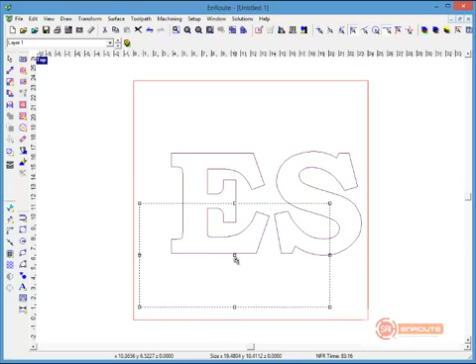Now let's just bring in some text here, and I'll bring in Bookman Old Style, which creates a nice stroke, and I'm going to type in EnRoute software. So we'll just put ES here just to bring some text on screen, and I'm just going to resize this. I see always an update of the height here. We'll just make it about 11.5 inches, a little over that.

Now I'm going to go to the text tool here and hold down on that, and then say convert this text object to curves. So now we have a couple of shapes on screen. Now I'll do this so that we have, first of all, a layer for our acrylic, and we'll do another one. We'll have a layer here for the aluminum. Alright, we have acrylic and aluminum, and let's just put this right in the middle of our sheet.

Make that just a little bit smaller and center that here. Okay, so this is going to be our positive acrylic. We're going to do a copy for this and put this on the active layer. So now we have this, and we would put a frame or something around the outside of that. So it's going to be a push through where we have a border here with some material, and these would be holes cut out of that center part.

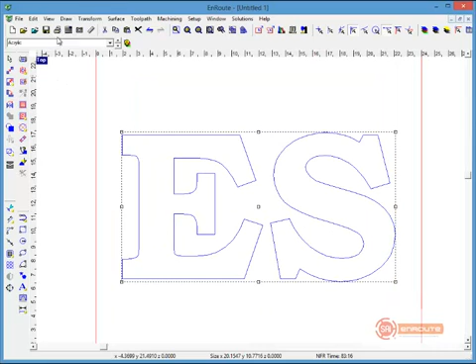Alright, and we'll go ahead and maybe just center this right there as well. Hit Control 5 and center it in the plate. So now we have two layers, aluminum and acrylic. Now the acrylic layer, I'm going to zoom in here a little bit so I can see this, and go to my toolpath menu and go to router offset.

Now we have this already as a strategy I can use where I've saved this previously, but we'll go through here and describe what we're going to do. We're going to go down to the end mills, which is my blue color here, and I'm going to select my 1/4 inch end mill. Different tools can be used, but we're going to use the same tool here to make this easy.

I'm going to use this tool twice. The first time will be a rough tool. The second time will be a clean tool. The clean tool will always be closest to the object, so that's going to create our shoulder. The clean tool will push the rough tool out, so the rough tool will still cut things out, and the clean tool width becomes the width of the shoulder.

So if we have 0.5 acrylic, let's say we're going to cut 0.51 for the rough tool, and then the clean tool we're going to not quite cut all the way through. We're going to cut 0.45 inches deep here. That's going to leave a lip of 0.05 inches. Now we'll take a look at a few of the parameters.

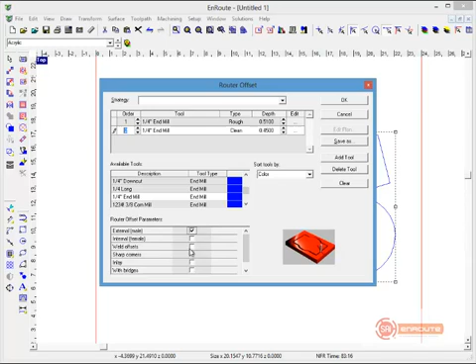We might want to weld offsets here because these letters are close together. So I imagine that we're going to have some connecting of these parts, so we do want to weld the offsets. And if I'm going to push this through another part, I'm going to do an inlay. So I'm going to come here and say 0.0, and you can use different values for different materials.

I'm going to say 0.01 for this, and this is the total inlay gap. So it's going to put 0.005 on the male part and 0.005 in the female part. When you are assigning the gap, you're doing the total gap. You do not treat them independently.

Now that we have our parameters set, we'll go up here and look at some cut definition, and we're just going to set our feeds and speeds here, based on the particular type of tool and the chip load that it might have. So we'll just put some kind of generic values in here.

And now for my clean tool, the clean tool, remember, is going to push out the rough tool. So I'm going to be concerned about the width here, and how much material do I want it to leave. So I'm going to make it a 1/4 inch width, and this is a shoulder, so I'm going to click shoulder. So I know that in addition to this letter here, I'm going to have 1/4 inch of material cleared out that is going to become the little shoulder that is going to keep my acrylic from pushing through. Now again, we'll put some feed rate values in here.

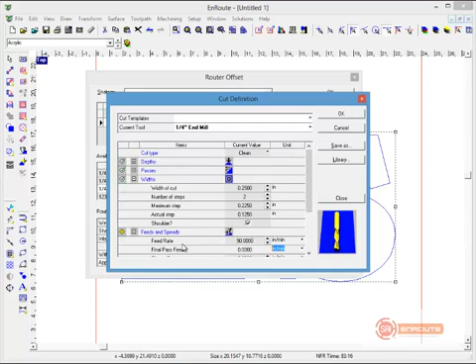And we can hit OK. So we have our feed rates here, our depths were assigned. We're just cutting this one all the way through. The other one's not going to go all the way through. One last thing is we want to do our clean pass before we do the cutout. So we'll do clean first, cutout second within the router offset strategy.

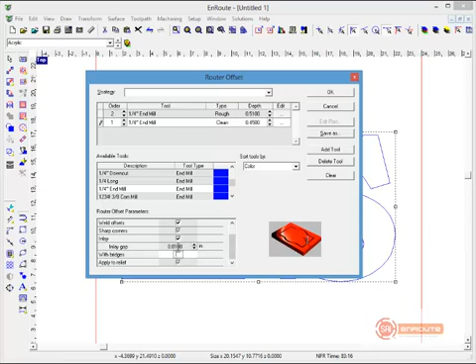And we have a 0.01 gap, remember, for our margin. Now I'll come here and hit OK. And we did just connect right here where these two parts were close enough together to touch. So now, if I zoom in here, you can see that the green part, if I hit F9, it will paint it with the width of material it's going to remove. So this green represents my push-through shoulder, and the blue represents where it's going to be cut out. And it's just going to touch right here.

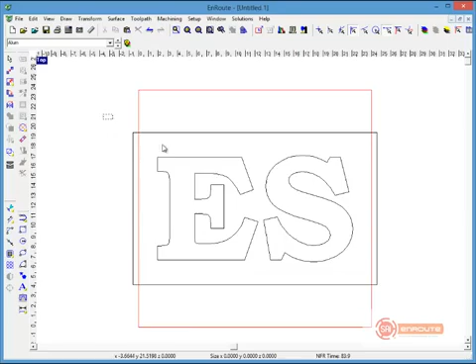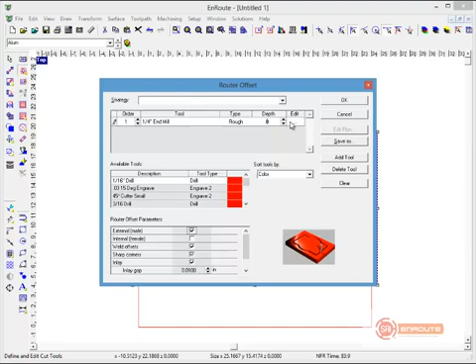Now when it comes time to do the pocketing, we are going to take these parts, and in this case we're going to use also an offset. It's also going to be a rough cut, but we're not going to have a clean pass here. There's no shoulder. We are going to do an inlay, and we can keep weld offsets checked. It's not going to weld those because they're not going to be touching on the inside when we do that hole. And the material here, let's just say it's going to be 0.060 aluminum, so we'll put 0.07 here.

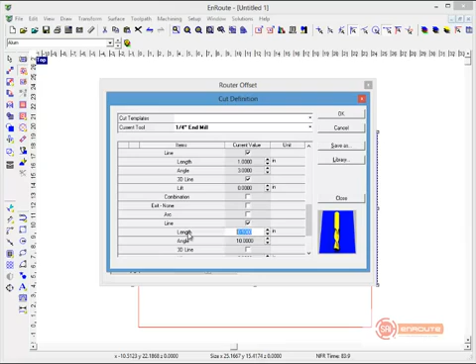Now if you're doing aluminum, you most likely will be doing an entry exit. So I'll come here and do maybe a line entry, 1 inch, 3 degrees, 3D line, inch, 10 degrees, 3D line. So a little bit different here because we're going to have that inlay, but the entry exit, and we are going to keep the inlay. When we hit OK here, we'll see that we're going to start off that line a little bit, but this is going to create the outer part and put some inlay radius that's going to match our other male part.

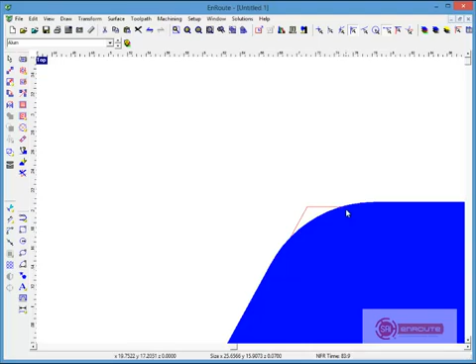And we see here the inlay gap of 0.005. It's making this hole just a little bit bigger for that inlay gap. And if we have both of these parts in the same spot, which I did on purpose and didn't move them around, we should be able to turn on both layers and see that everything's going to fit together without any white spaces indicating a gap. So here would be our male part, and let's take both of these here and just move them to the lower left hand corner of the plate. Fit plate to selection, then I'll just kind of match everything up there.

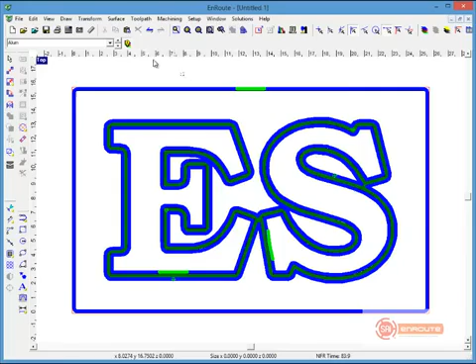But here we have our male push-through part, which has got a little radius on the outside corners here, as you can see, and we have our parts, which will be the female part because we are pushing through this internal part here. And this would be how you would go about creating both the face plate and the male parts of a push-through letter.

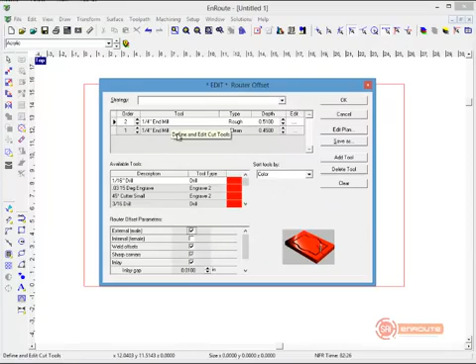Now, of course, one of the nice things about EnRoute is that once you have something, and say in this case we have a toolpath that works well for a particular type of application, a push-through letter, we can take this information and save it and make it easy to apply to other shapes in the same circumstance. So here I'm going to take this router offset that has these multiple tools in this particular cut order. I'm going to hit Save As, and let's choose an existing name here, Save As Push Through, and I'm going to hit Yes.

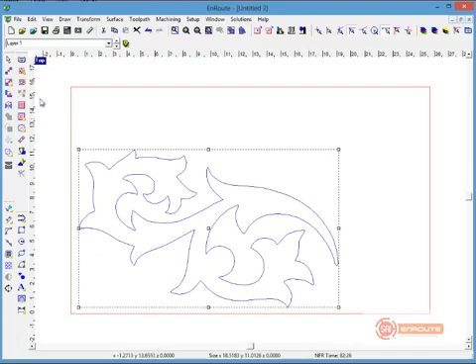So now I've saved this, and if I have another type of shape I might be working on, let's just come in here and bring in a 2D geometry, and now I want to do this particular shape as a push-through letter with that same type of toolpath. Of course EnRoute will remember the last things we've used, but we can clear all this out and uncheck all these parameters. If we come back in here and now say we want to use the push-through strategy, it remembers all the parameters and the feed rates and all the other variables, and then we can just hit apply and not have to go through applying all those settings again.

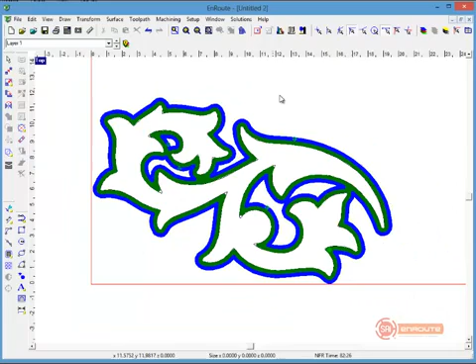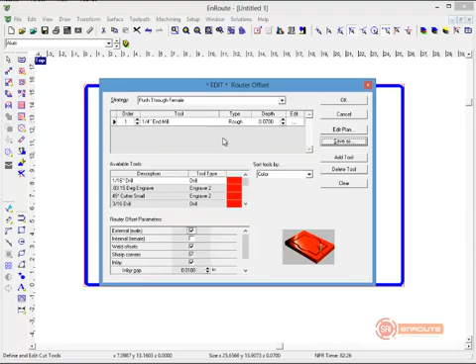And now we would have a push through on this particular shape, and we can also make that take place for the front part of that, which is the male inlay part. So we're going to go edit this toolpath, save as, and we'll call this push through, and this is actually the female part. Now we've got these parameters saved, and they could easily be recalled just by selecting them from the list here and hitting OK. So once you have the toolpaths doing the things that you want, you can save those and reuse them quite easily.